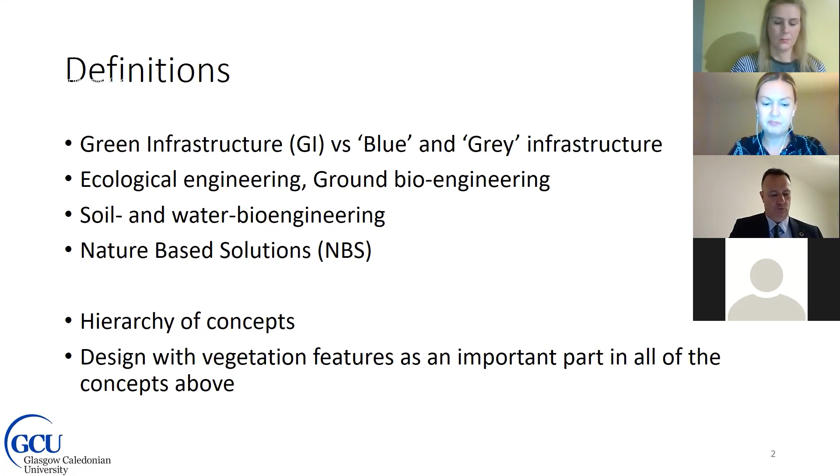The current experience shows that ecosystem-based approaches such as green infrastructure or nature-based solutions, soil and water bioengineering are cost-efficient policy tools, but they're not used to their full extent, and their potential should be further strengthened at national or transnational level, perhaps through integration of the engineering components, for example, standards, best practice, learning, etc., within the existing policy instruments. It is within this typological hierarchy that we find the design with vegetation as an essential and very important part which needs more attention and definitely full consideration.

In 2015, the United Nations set out 17 Global Sustainable Development Goals, SDGs, with some 169 sub-targets, most of which are directly or indirectly connected to some form of infrastructure. Considering the fact that the built environment and construction industry employ a significant portion of the workforce globally, it is essential to understand that sustainability for the infrastructure can only be achieved if the elements associated with it, such as people, environment, physical infrastructure, are supported and sustained.

As our built environment and the wider economy become more information-based, associated softer infrastructure will be required to keep pace. In particular, new frameworks, organizational structures, and business models will be required to understand, plan, manage, and regulate the green infrastructure and the related data infrastructure in order to ensure stability and resilience. Stability is the resistance offered by a structure or a system to undesirable movement like sliding, bearing, overturning, etc. While resilience is the ability to absorb or avoid damage without suffering complete failure. Both of these concepts apply to both engineering and social and natural systems.

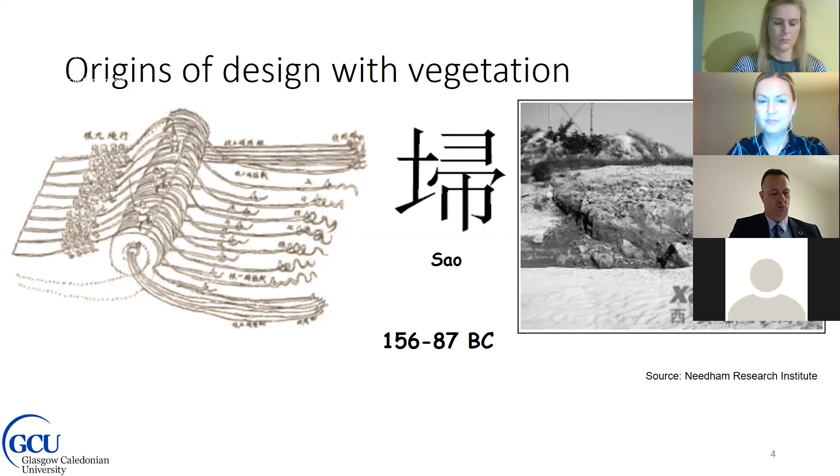All of them regions still suffering from hydrometeorological hazards such as landslide, flooding, or erosion. The last 25 years have seen a revival in the use of vegetation for civil engineering purposes, either as a standalone technique or in combination with traditional civil engineering materials and techniques. This revival coincided with the quantification and appreciation of the hazards facing our planet due to climate change, bringing the sustainable use of vegetation to the fore of the preferred techniques to combat geoclimatic hazards.

Now, I see ground bioengineering design as a journey of rediscovery of the full greatness of technological achievements and thought in engineering, as well as an endeavor to compete with these achievements on an ideal plane. This ideal plane can be slope stability, where major tree roots act as mini piles or soil nails. It can be soil strengthening, where the small wiry roots penetrating the soil create a composite reinforced material. It can be drainage using the evapotranspiration potential of vegetation. It can be provision of habitat, biodiversity for conservation purposes, or it can be a combination of all of this

and much, much more. The combination of these effects make the vegetation conducive towards addressing the SDGs on climate action by enhancing the resilience and adaptive capacity of infrastructure to climate-related hazards and natural disasters globally. These hazards include shallow landslides, flooding, erosion, as I said, which are expected to become more frequent in the near future. These hazards can originate out with the infrastructure or within it and affect not only infrastructure users, but also construction workers and the general public.

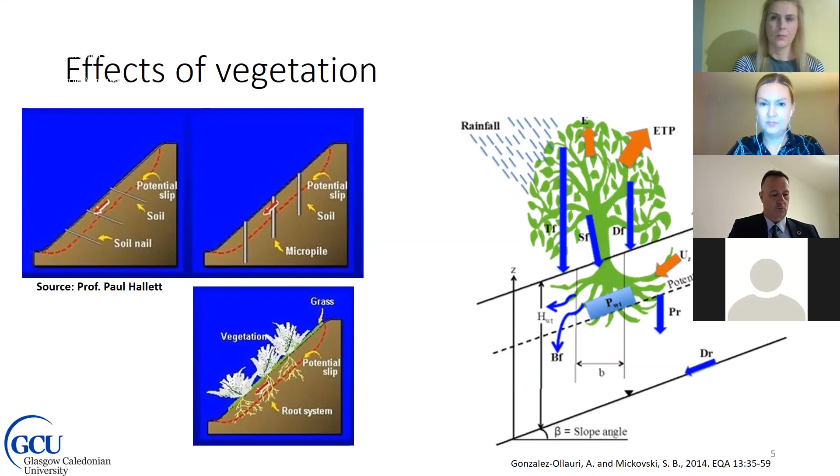Due to the increased likelihood and the potential severity of these hazards, there is a need to integrate climate change measures, especially the ecosystem-based climate actions, such as green infrastructure, nature-based solutions, etc., into national, international policies, strategies, and planning, but also to improve education, awareness raising, and human and institutional capacity on climate change mitigation, adaptation, and impact reduction.

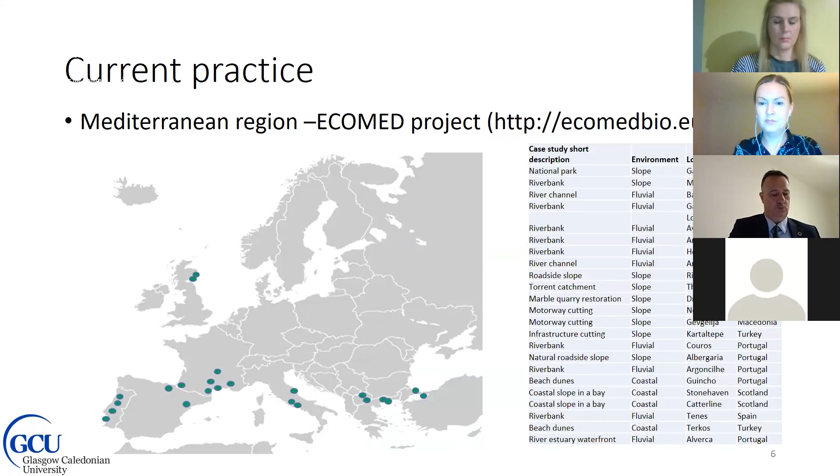Recent years have brought many green infrastructure projects into the eye of the professional and general public. To illustrate this, I will use the information gathered through a recent transnational project I participated in, the ECOMED project, which was financed by the European Commission with an aim to generate new alliances and dynamics between the academia, research institutes and industry. The case studies we reviewed in this project include soil and water bioengineering projects in fluvial, coastal or montane environment. They range from riverbank stabilization through coastal dune management through slopes in transportation. The common denominator of all of these projects is the sustainable use of vegetation for civil engineering purposes.

Environmentally, they provide biodiversity and habitat for the flora and fauna. Locally available materials can be used in the construction of these structures, which can also combine traditional structural materials and other biodegradable materials. These two, combined with the social acceptance of the aesthetics, add major sustainability value to the eco-engineering structures. The resilience of these structures is provided by the living elements in them and can be demonstrated in the longer term when the inert materials would lose strength due to natural processes and external loads, but the structure will not collapse because the loads are now transferred onto the vegetation, which will provide a more ductile response to the loading conditions.

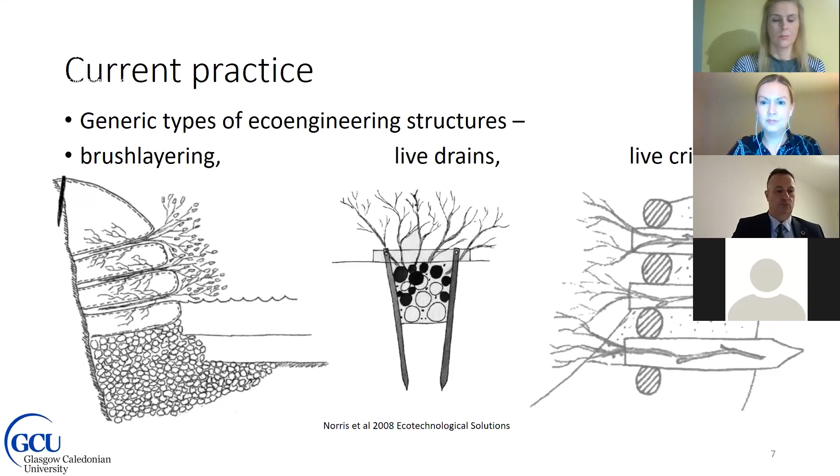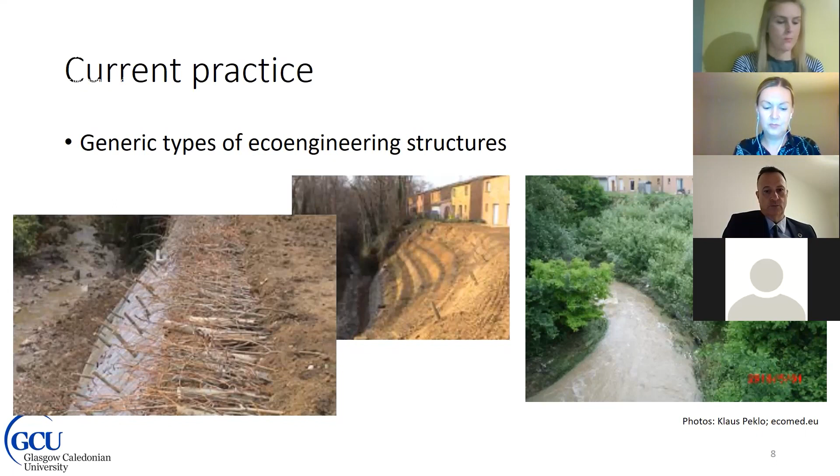Not to mention alleviating the fears of the local residents when it comes to collapse of their property. The second one I have here is an example of eco-engineering used as a supplementary technique to traditional civil engineering works. To stabilize a slope periodically undermined by a dynamic flash flood fueled stream, our colleagues from JemmBuild in Italy designed a type of gabion wall which in the long term will prevent progressive slope failure due to geoclimatic effects while providing aesthetic value for the community.

The permeability of the structure governed the design solution, which had to provide enough pore space and capacity to allow water flow, but also enough moisture retention to allow for root growth. The photo taken a few growing seasons after construction shows that the trees planted at the toe of the slope have prevented scour while acting as toe reinforcement.

Native vegetation colonized the structure at height, and you can see here the progress of this colonization by the different vegetation types inhabiting different layers of the structure. You can find more details on this project on the ECOMED webpage.

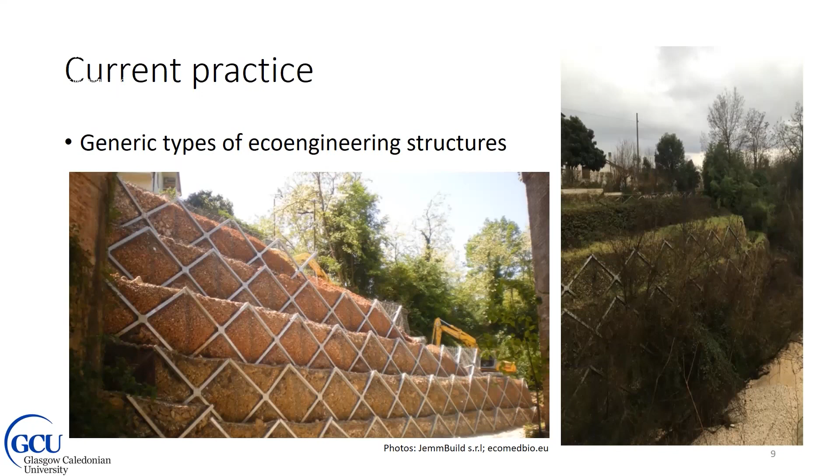Finally, I want to show you that eco-engineering techniques are often applied for erosion protection in a coastal environment. In this example from Portugal, details of which are also available on the ECOMED webpage, you can see the planting technique applied in situ and combined with construction of a sediment control barrier made of inert, locally available material.

The wind erosion, which was the major geoclimatic hazard on the site, is controlled by the sediment trapping capacity of the inert material until the planted material is strong and high enough to take over this function. The overall sustainability of the beach as an ecosystem is achieved with the choice of native vegetation, and the resilience by protecting the planted material with an inert material until the necessary strength and geometry are achieved.

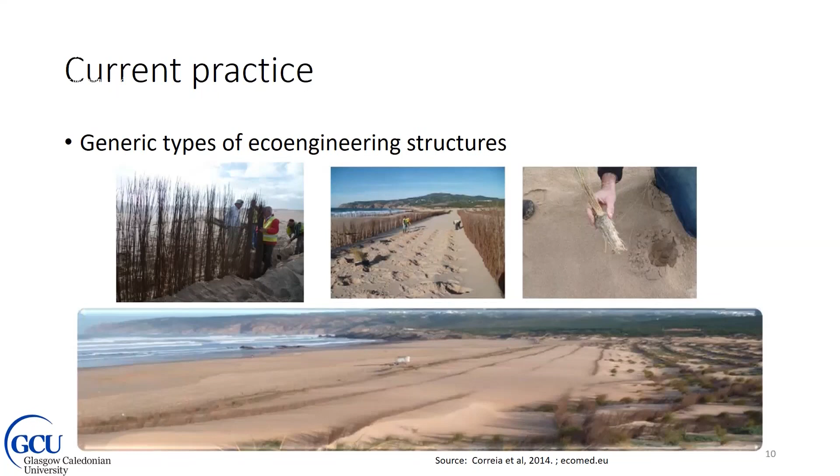In the current ground bioengineering practice, at least across Europe, the scientific research has rarely been reconciled with the engineering approach toward design and construction. This has led to an inability to scale up the biological and physico-chemical effects of vegetation or to choose appropriate vegetation for mitigating different climate change effects when it comes to design and construction.

On the other hand, the engineering design aspects have not been taken into account when investigating ground bioengineering systems and their components. All of this has resulted in a slow uptake of this approach by the construction industry and overshadowed the urgent need for achievement of the SDGs across the whole life of a ground bioengineering project.

To explore the viability of ground bioengineering as an effective approach for combating the effects of climate change, and to highlight the areas where civil engineers should focus in adopting this approach, I tried to analyze the set of successful and less successful climate adaptation case studies across Europe provided by the partners of the ECOMED project against the project life cycle stages, and to highlight the existing knowledge as a basis on which civil engineers can build with innovation in order to respond to the global climate change challenges and the achievement of the SDGs.

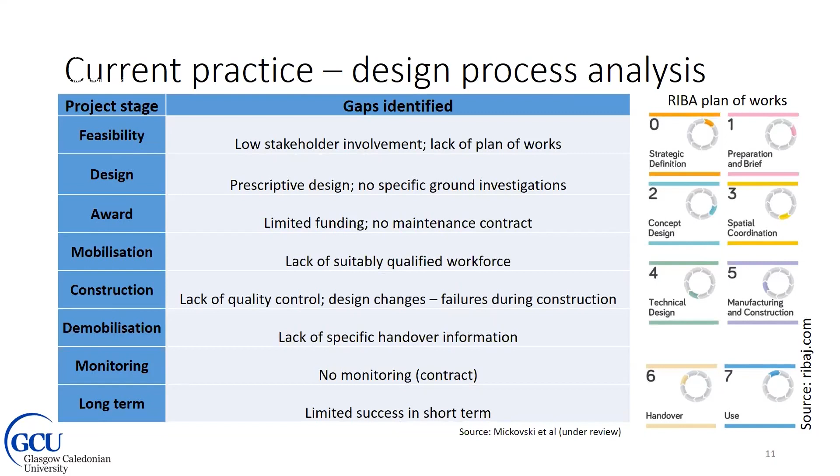Civil engineering design is the art of the possible, if you like, and its success is measured by the degree to which the engineer has explored the limits of what was possible under a particular set of circumstances, structurally and aesthetically. Successful and innovative design starts with assigning an engineering function to the vegetation. This function could be to reinforce the soil, stabilize the slope, retain sediment, attenuate runoff, or similar.

Furthermore, this function could be achieved with only vegetation or in combination with traditional civil engineering materials and techniques. A broad agreement on this choice and effective communication with the stakeholders is also essential at this stage. With this, we can avoid marginalization of the vegetation to aesthetics only, landscaping only, while utilizing all the engineering properties it can contribute to the stability of the structure and the sustainability of the environment.

In order to inform this very important decision, a suitable hazard and risk assessment should be carried out. The process is similar to what we are used to in traditional civil engineering, with small differences in accounting for the effects of vegetation. To highlight the sustainability and resilience the vegetation can contribute to, the driver would usually be an effect of the climate change.

For example, an increase in precipitation volume or a change in the rainfall pattern, and the risks which pertain to the vegetation would include short-term, long-term stability, which will capture the temporal changes, for example, the growth over time, and also sustainability, which would capture the plans for creation of habitats, enhancement in biodiversity, provision of recreational facilities, carbon footprint, etc.

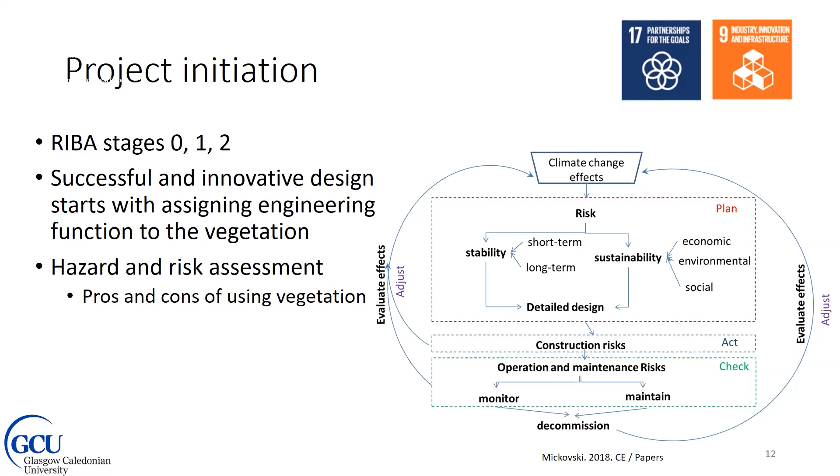To capture this in contractual terms, the pre-qualification and quality submissions at tender stage should comprise an assessment of sustainability of the proposed actions by the tenderers against generic and specific climate change challenges associated with the project, as well as a commitment to a minimum site disturbance during demobilization and the defects correction period.

The evidence of the effects of ground bioengineering approach against the effects of climate change, presented not only here but also in the published literature, should motivate the engineers to embrace this approach from the inception or feasibility stage of the project. The eco-engineering designer needs to have a bold analytical mind and be ready to always discard conventional solutions if better, more sustainable ones could be devised.

Once the engineering problem is identified and a connection is made with one or more climate change related hazards, the range of potential engineering solutions should include at least one where an engineering function is assigned to the live or green part of the structure. These considerations can be made on the basis of existing successful or unsuccessful case studies, experience as well, but will have to be contextualized with preliminary investigations specific to the project location and environment.

Such investigations would include not only the standard geohydrological or environmental investigations, but also investigations into the mechanism through which the live element is to provide the engineering function and the biological constraints associated with the potential solution.

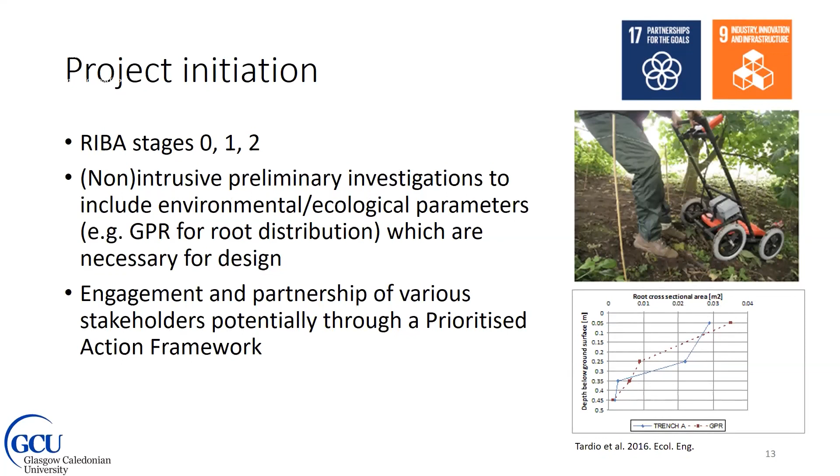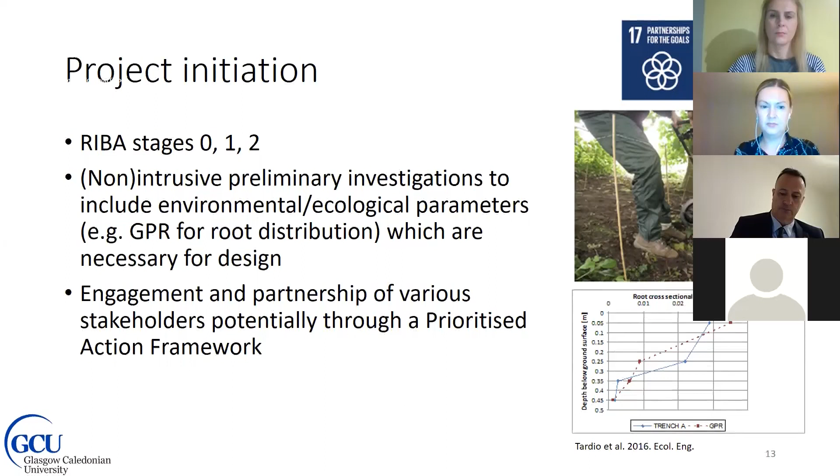If the project is of a larger scale or conservation-based, for example, a prioritized action framework, as well as mapping and assessment of ecosystems and their services, can be done in accordance with the European directives. This is a very good opportunity for a civil engineer to enter ground bioengineering planning at a strategic level, because with the exception of Germany's national green infrastructure concept, the European countries have not yet adopted national strategies specifically dedicated to green infrastructure.

Now, ground investigations are likely to provide us with a range of parameters which can be used in the scheme design. Both scheme and detailed design, however, need to take into account the major effects of vegetation, which can be broadly divided into mechanical, hydrological, and environmental. The main mechanical effects of vegetation are usually the reinforcement the small roots provide to the soil and the ductility the roots provide during shear failure.

Previous research carried out in situ and in laboratory indicates that smaller roots contribute towards an increase in cohesion of the root soil composite. The magnitude of this cohesion varies with vegetation type and age, as well as depending on the nature of the failure. Here you can see an example of an in situ measurement of root soil reinforcement and thus cohesion we did with colleagues from France some time ago in China. We also sampled rooted soil in situ and tested it in the laboratory to quantify the root reinforcement, which you can see in the shaded area in the graph in the middle.

We also tested the roots in tension. This is a stress state expected during pullout caused by shear failure, for example, a landslide. Root tensile strength and their distribution laterally and with depth, which can be determined using specific ground investigations I mentioned in the previous slide, can be used to calculate the root added cohesion. A number of rooting models exist and can be used, but for example, Wu's root reinforcement model lends itself particularly well to the civil engineering rationale.

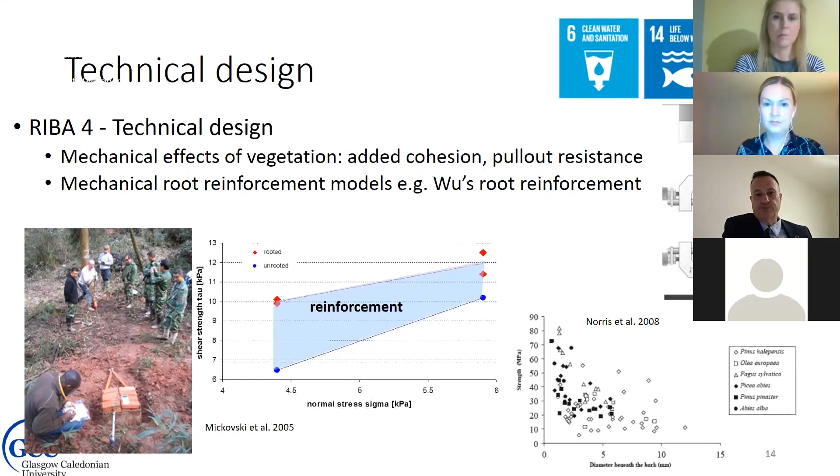This condition would allow time and opportunity to the engineer to mitigate the effects of this failure as observed on different sites across the globe. It also would allow time for the vegetation to grow new roots, which would adapt to the new condition and then further stabilize the soil and continue to provide adequate habitats on land or near water.

When we talk about water, let's touch on the hydrological effects of vegetation. They were historically much less understood and were neglected due to the misconceptions. For example, the vegetation behavior during the winter period. Namely, the above ground parts of the vegetation intercept and attenuate the precipitation that would otherwise reach the ground immediately.

This effect is potentially best used in green infrastructure design solutions like green roofs, for example, where the selection of vegetation type combined with a suitable, potentially recycled substrate can provide a thriving environment for both flora and fauna while regulating the peak runoff and also providing a source of grey water for a building.

The roots, on the other hand, use the water available in the ground, which can be groundwater, but also any precipitation that percolates into the ground, and through the process of evapotranspiration, effectively pump this water in the above ground part. What the evapotranspiration leaves in the ground is a state that resembles sucking out water through a straw from a glass full of ice cubes. The particles will get close together and adhere to each other due to matric suction.

The matric suction, or negative pore water pressure, which demonstrates itself as an additional cohesion, will give additional strength to the soil, which then helps in reinforcement and stability problems. The magnitude of this contribution can be established using ground investigations and testing, both in situ and in the laboratory.

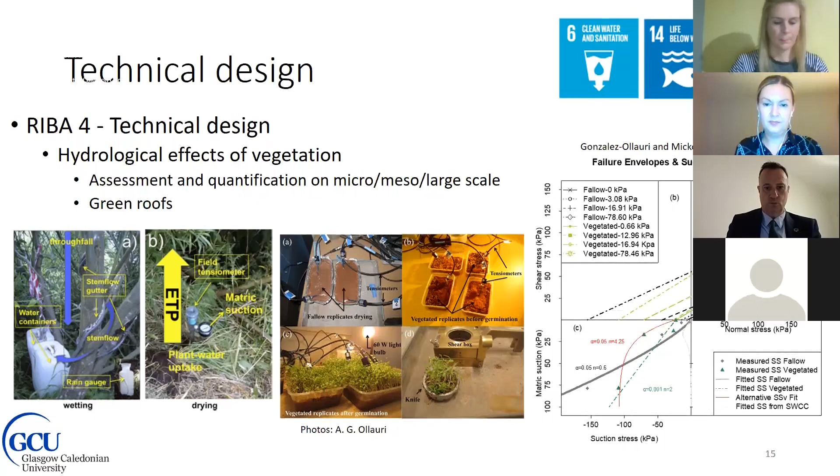To outline and quantify the environmental effects, on the other hand, we need to think of the hydrometeorological hazards as drivers of local disturbances on our sites. These can be disturbances of the types of shallow landslides, for example. These, although unwanted from an engineering perspective, occur regularly and foster the evolution of slope landscapes as part of their self-regulating capacity.

Hence, gaining insight into how slope ecosystems function and evolve could make eco-engineering interventions on slopes more successful. The investigations we did on a coastal slope with a history of failure in Aberdeenshire confirmed that shallow landslides contributed to biophysical diversity, but also created distinct slope habitats within that landscape. Habitat differences in terms of species richness and compositions were a direct consequence of the slope self-regulation.

Practically, this means that the natural resources are more depleted at the crest, where the failure originates, and most abundant near the toe, where the sediment deposition takes place. What this means for design is that any intervention near the crest of the slope will have to be focused on vegetation able to thrive in a harsher, nutrient-depleted soil, but also able to provide a quick and versatile habitat.

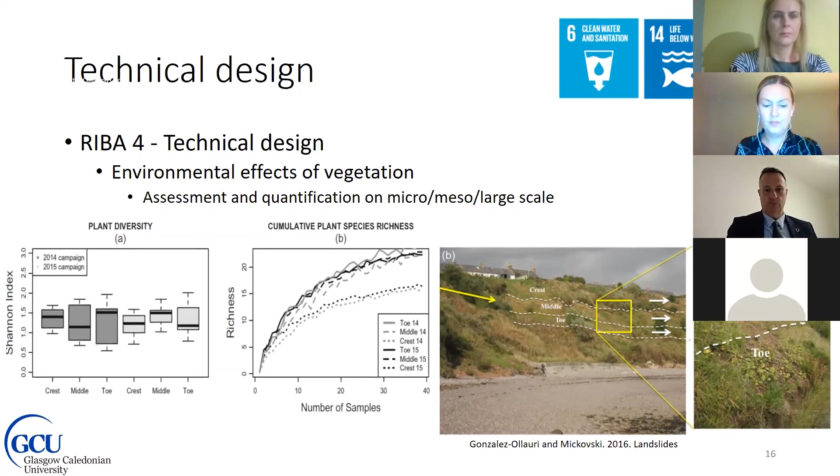Once the vegetation effects have been accounted for on a micro or mesoscale, we can upscale to slope scale, catchment scale, in order to review the hazards and risks, to model the behavior of the nature-based solutions in place, and to assess the environmental effects. Apart from comprehensive ground investigations and understanding of the mechanical and hydrological effects of vegetation on a small scale, the engineer here will need tools like geographic information system, data from longer-term monitoring in situ, so relevant.

In the example presented here, we have combined the hydrological hazard assessment based on the hydrology and topography of the site with the slope stability assessment, which is based on the geology and vegetation cover of the site, and produced a risk map which shows the areas prone to instability, areas at the highest risk.

Multidisciplinary modeling and assessment of this type allows the designer to focus on the most hazardous areas when designing a mitigating solution. They also allow the designer to understand the extent and the modus of instability processes, which, if you remember, was the first step in the project initiation stage.

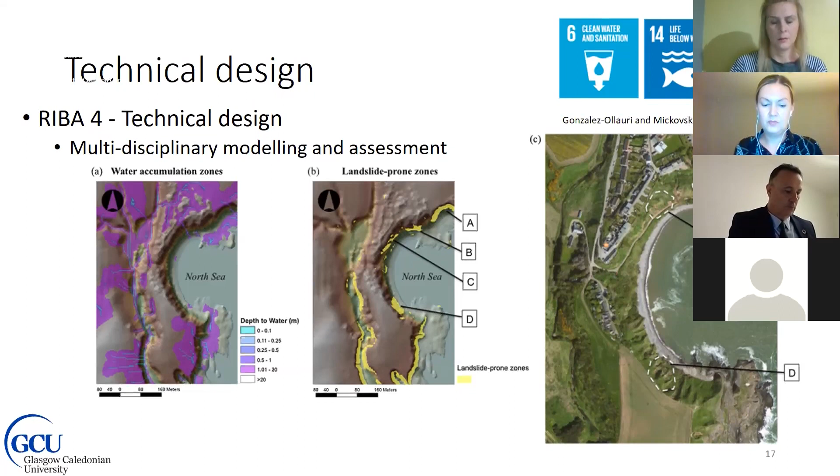The software we used, or the model we used here, is called Plant-Best and comprises specific detailed design protocols and routines which can be used in design for stability while accounting for the spatio-temporal distribution, hydrological effects, mechanical effects of vegetation, anything of this sort within the eco-engineering project.

These protocols and routines are based on commonly accepted engineering principles, but are not specifically associated with any national or transnational standards at the moment. Future efforts will be focused on translating this into Eurocode language and synchronizing them with the relevant national standards.

Notwithstanding this, the Plant-Best model is capable of determining the optimal vegetation characteristics which would provide stability and sustainability against hydrometeorological hazards such as rain-induced shallow landslides or erosion. These characteristics include root system morphology, branch or crown architecture, their respective contributions in mechanical or hydrological reinforcement, etc.

It's interesting that the most sensitive vegetation characteristic deployed for soil stabilization turned out to be the root system morphology and the crown area, which both reflect mechanical and hydrological groups of vegetation effects. While the crown area is relatively easy to measure and monitor, the importance of specific ground investigations comes to the fore yet again when attempting to determine the root distribution laterally and in depth.

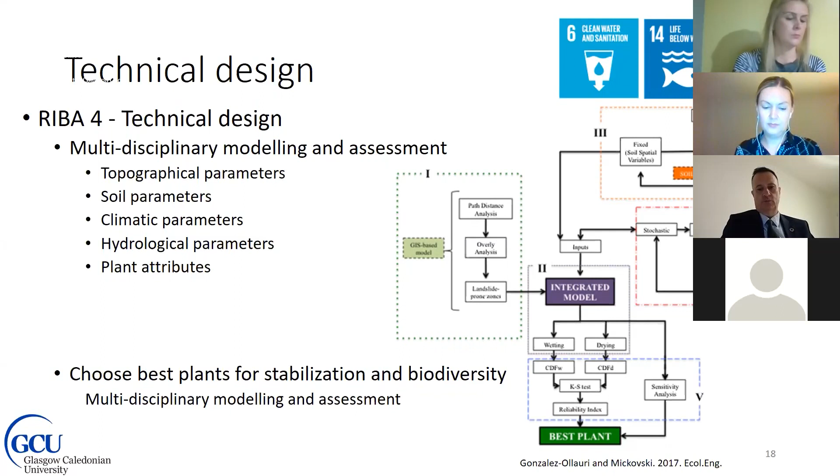The traditional design, civil engineering design, if you like, is a two-phase affair. The designer makes a plan before acting on it. And because the designer or their clients had made all important decisions in advance, they have to worry only about the means rather than the ends while carrying out the plan. In this process, there is little risk and little afterthought, which as a consequence tends to become a routine.

For eco-engineering designers, the conception and execution of works go hand in hand and are so interdependent that they can't be separated one from the other.

Whereas the traditional designer only attempts what they know is possible, the eco-engineer is always tempted to attempt the impossible, or at least the improbable, or unimaginable, because of the lack of knowledge of the processes going on, for example, in the nature below or above ground. This is why the spatial coordination of the NBS projects is very important in ground bioengineering projects.

Traditionally, specialist and highly qualified labor and/or specialist construction would have to be mobilized to and from the construction site, making sure the environment is disturbed as little as possible. The NBS projects, which are designed with vegetation at their core, can greatly improve sustainability by the use of locally available labor and locally available construction materials. The fact that native vegetation will always be preferred to exotic species allows for collection and use of it in the construction.

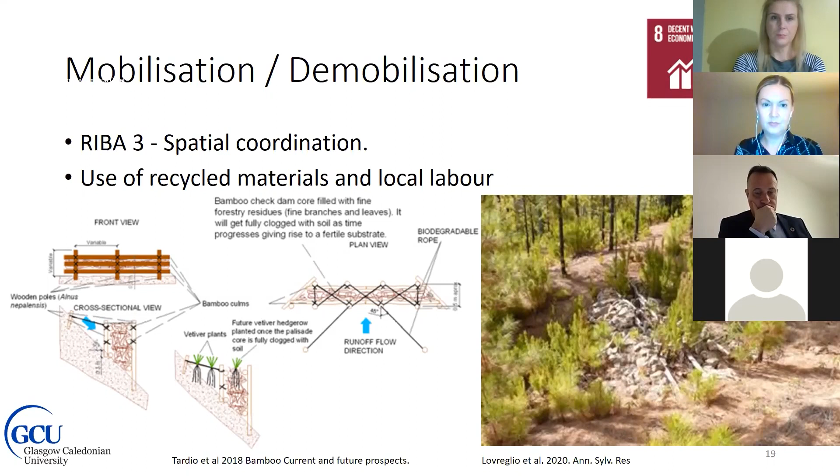The construction project stage, perhaps the most critical for the success of our ground bioengineering project, should be carried out only by professionals who are suitably trained in the specifics of both civil engineering and plant science. As remarked by a number of professionals surveyed during the EcoMed projects, such a workforce would be able to respond to changes in the design or climate conditions very quickly without compromising the overall sustainability of the project.

Cognizance should be given to the vegetative period of the plants employed in the project, as well as to the potential interaction between the living environment, animals, insects, bacteria, birds, etc., the climate drivers like wind, rain, solar insolation, etc., and the inert and living construction materials. The existing specifications for construction can be used together with the experiences from previous projects in order to minimize the time needed for construction, but also, very importantly, to train the workforce.

The construction of nature-based solutions doesn't differ greatly from the construction of traditional civil engineering measures. The major differences are in the philosophy of the design, which for NBS allows a temporary construction or structure to become permanent and thus increase the sustainability and resilience value of the project. One example of this philosophy is the construction of live drains, which would be used as temporary drainage structures during construction, but will continue to function as permanent drains once the live material within them has rooted and started to provide stability and reinforcement to the surroundings.

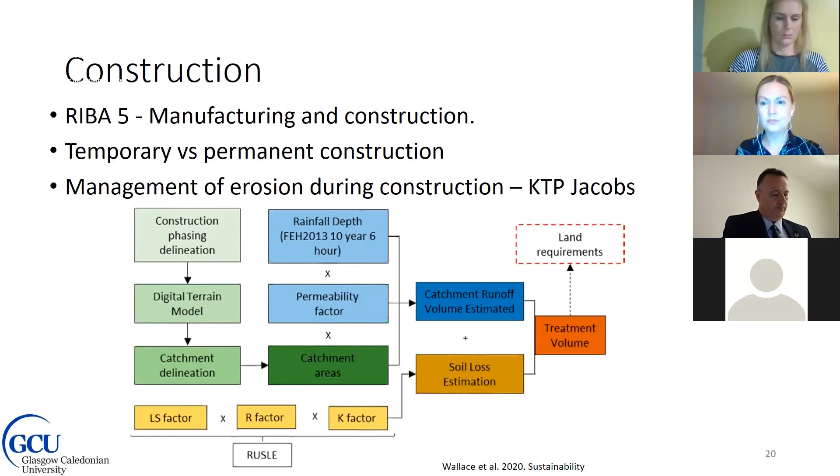Due to the specifics of design and construction with vegetation, special care will have to be taken during the early stages of operation and maintenance of these projects, when the vegetation needs to develop the below ground and above ground parts, which then will perform the engineering functions in the long term.

Frequent inspections and surveys should be done at this stage in order to record the development of the green infrastructure. Relevant data should be collected from these surveys and fed into numerical models able to assess the stability, performance, sustainability, etc. of the live structure at different development stages. This can be contractually regulated by including a maintenance contract or subcontract in the project documentation, a part that was highlighted as currently significantly lacking across the EcoMed case studies I talked about previously.

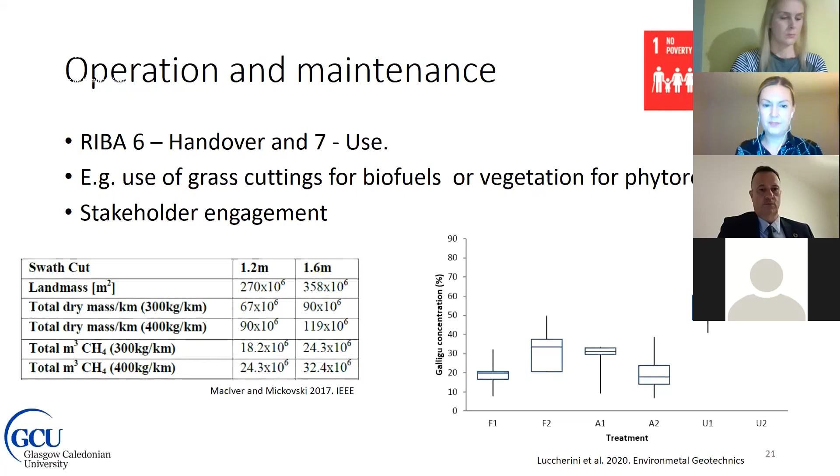One of the major gaps identified in the analysis of the case studies from the EcoMed project was the lack of monitoring and long-term sustainability design. In contractual terms, it is important that the temporal scale of the vegetation effects is acknowledged through planning for the full project life cycle. The focus should be the sustainability of the project in the long term, so adequate, relevant maintenance and monitoring carried out by suitably skilled professionals should be included in the contract.

Adequate and relevant monitoring should then include integrated, real-time, multidisciplinary measurement and analysis of the parameters critical to the stability and sustainability of the installed structure. These would supplement the standard geotechnical or structural monitoring by incorporating relevant measurements of the vegetation parameters, and would also include periodic sampling and in situ or laboratory testing. Draft protocols and specifications for monitoring of NBS exist and can be used together with monitoring information.

For example, for a number of years now, we have been including a range of stakeholders in the monitoring of our eco-engineering project sites, and we have been applying the citizen science concept to get the stakeholders closer to their local environment while collecting important scientific data, which we then use in design and modeling of the ground bioengineering solutions.

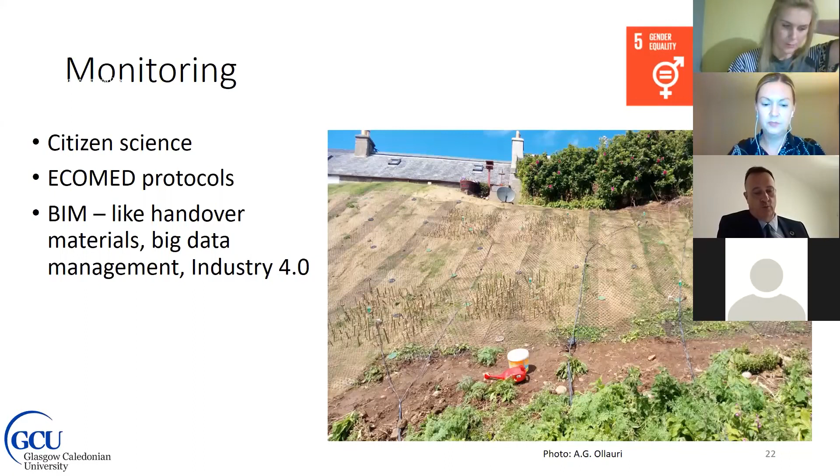When designing the monitoring program, the engineers should be guided by the BIM standards, Building Information Modeling, and the digital twin or Gemini principles, which allow or will allow for more efficient life cycle management of the installed measure and safe decommissioning at the end of its life, both of which will contribute to the circular economy objectives.

Due to the specifics of using vegetation in engineering applications, decommissioning should not be understood in its classical sense. The eco-engineering ethos envisages the vegetation taking over the engineering functions of the green infrastructure in the long term, while providing a suitable environment for enhancement of the engineering function and vegetation succession. Due to this, the engineering design needs to take into account some specifics of the long-term behavior of the vegetation.

As mentioned previously, the vegetation needs care and maintenance in the short term until the engineer is satisfied that the physiological functions have been established and the live materials are thriving. Once the roots and the above ground parts start to grow, the vegetation would be able to take a proportion of the loads imposed on the structure.

And then with time, the inert materials, which may have been used as protection for the vegetation and structural support in the short term, will start to decay, erode. During this transition period, which depending on the type of materials used, can range from months to decades, the vegetation will take over the main stabilizing and supporting function for the structure until the point when the inert materials have completely decomposed or eroded and all the loads are taken by the live parts.

This process of load transfer can be captured in the design by allowing for the decay of the inert materials and root system development at various stages in the life of the project. In the past, we developed a framework and protocol for design checks that would allow for the vegetation effects and also durability of the inert materials in a slope stability context, which can be used in any eco-engineering design project where a combination of live and inert materials is envisaged.

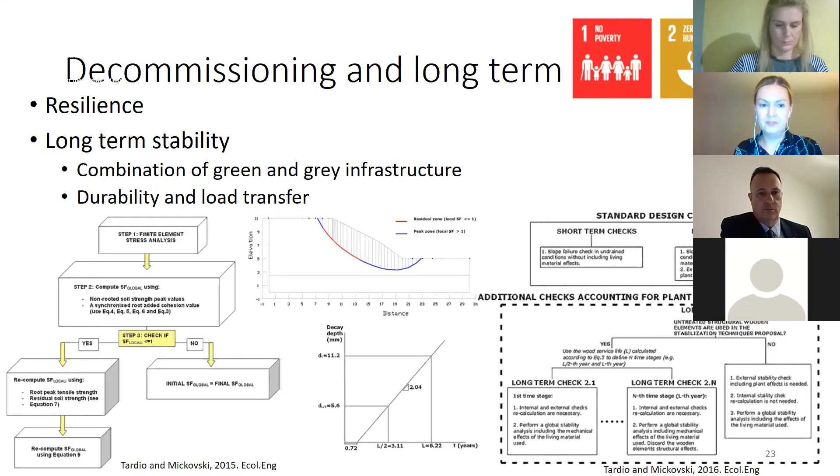The assessment of the long-term impacts as well as sustainability of eco-engineering strategies can be challenging and remains largely neglected within the literature and in practice. The challenge lies in achieving a balance between the delivery of the project objectives and their alignment with the principles of sustainability, resilient design, which will seek to provide an appropriate and satisfactory environmental and financial performance while delivering social benefits.

Whilst it's possible to assess various aspects of the long-term performance of soil bioengineering measures and the relevant projects in their delivery through cost evaluations, risk assessments, environmental impact assessments, as we all know from the industry, there is no standard means of assessing the sustainability performance of NBS solutions in an integrated framework which will capture the environmental, social, economic dimensions of sustainability. To address these issues, we recently proposed an integrated sustainability assessment framework which can be applied on any eco-engineering project.

This framework is underpinned by a review of sustainability indicators commonly applied in different assessment methods and best practice from relevant civil engineering disciplines. This framework includes a set of key performance indicators, KPIs, reflective of both engineering and sustainability requirements for eco-engineering in the context of stability, active use of vegetation, and long-term sustainability. The unique nature of each eco-engineering measure and its provision is established here within the framework with contextual indicators which sit within the environmental, economic, social, but also engineering set of indicators.

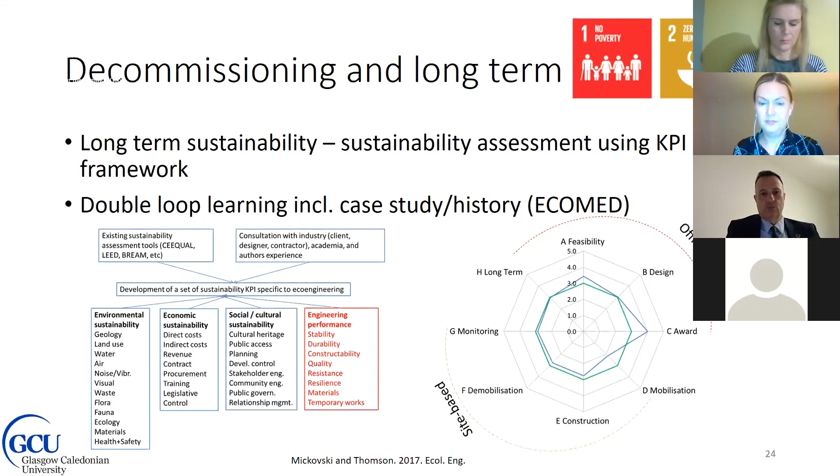We have demonstrated the application of this framework on a completed coastal slope stabilization project, the results of which you can see here on the radar plot. And we are working on similar assessments for eco-engineering projects across Europe. This approach allows the engineer to use the framework as a planning tool at the early stages of the project, but also as a double loop learning or lessons learned tool after the completion of the project. The use of the framework as part of an existing quality assessment, quality management procedure is convenient because it comprises a number of KPIs which are already being measured as part of other QA processes.

The eagle-eyed amongst you would have spotted that one of the SDGs is missing from my mapping against the stages of the project. I deliberately left SDG 4 for last because I believe that education is the basis of a wider, broader adoption of the eco-engineering approach. In order to sketch the roadmap for the soil and water bioengineering sector within the EcoMed project, we asked students, graduates, professionals, practitioners to reflect on the gaps in their education which could be filled in with additional training.

I also mentioned the application of some digital technologies in the design, such as the use of GIS and the big data concepts. The current efforts of the soil and water bioengineering research community, not only through the academic institutions, but also through, for example, the European Federation for Soil and Water Bioengineering, are concentrated on the enhancement of digital skills among the practitioners in light of Industry 4.0, for example, and the project lifecycle processes. The progress, however, is relatively slow and somehow reflects the progress in digitization of the construction industry, where specializations such as master's degrees are considered useful for achievement of personal and corporate goals.